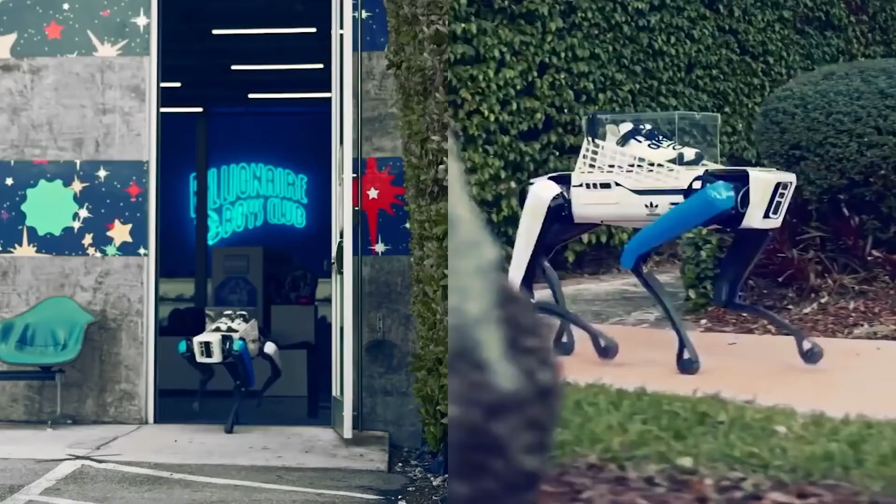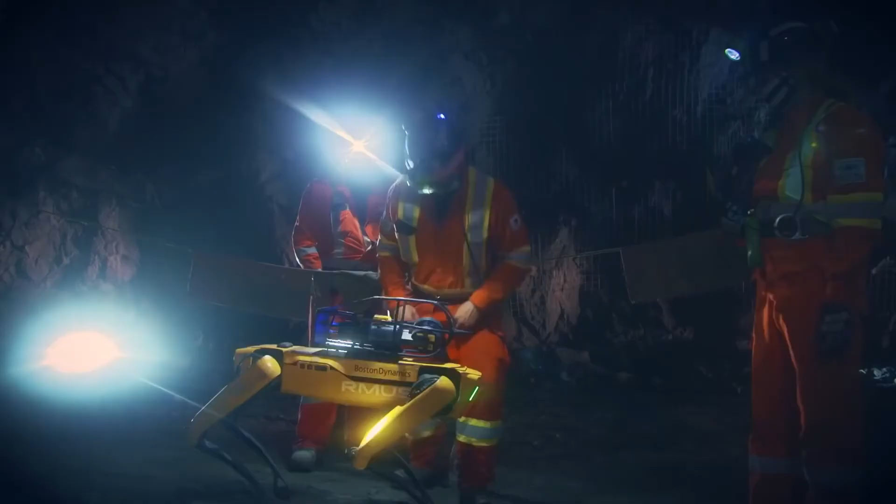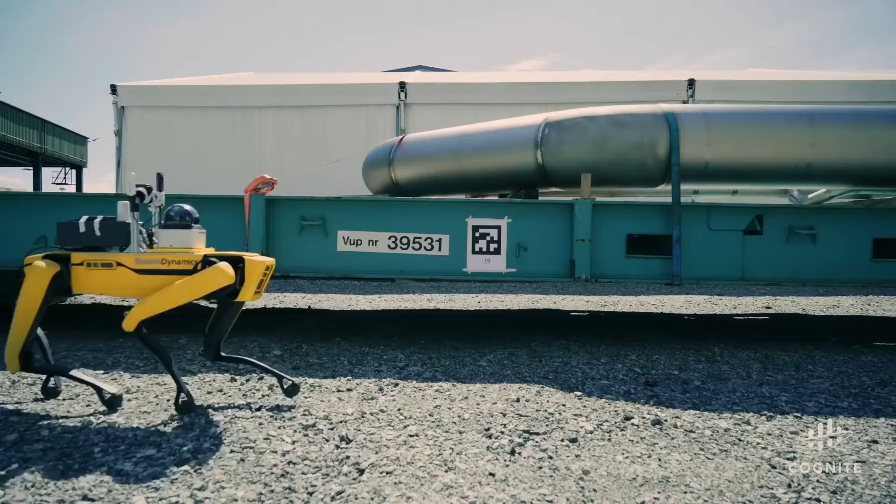Real live robot dogs! One priority is keeping employees safe. There's nothing that compares to the way that Spot steps or moves around objects. Traditional robots, it's impossible for them to get where we need them to go.

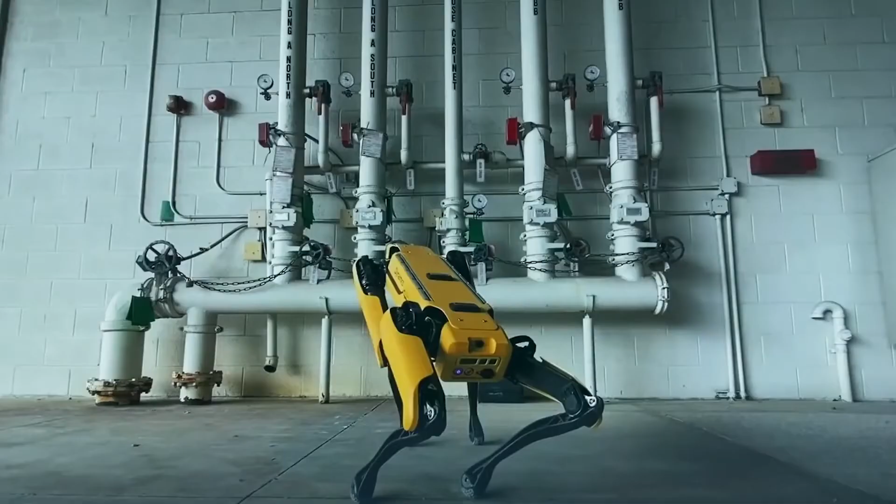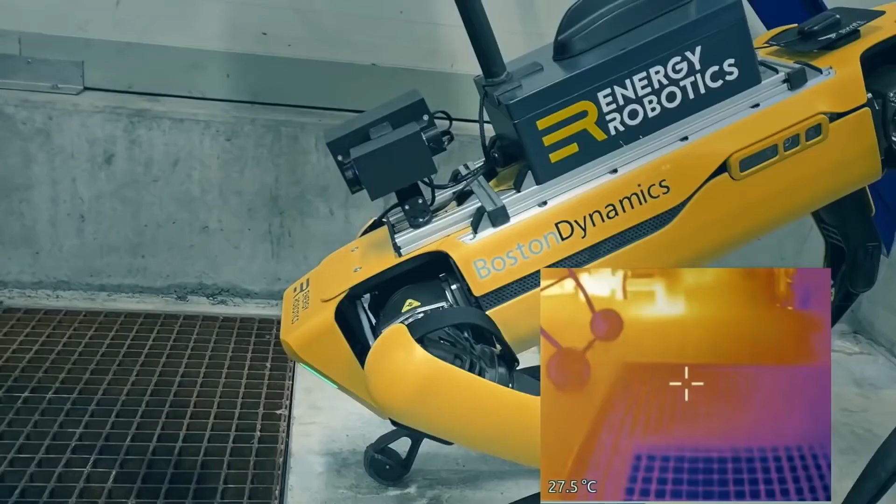Spot allows us to conduct our asset inspection tasks very repeatably and regularly. It's going to increase productivity, while also keeping our employees out of harm's way.

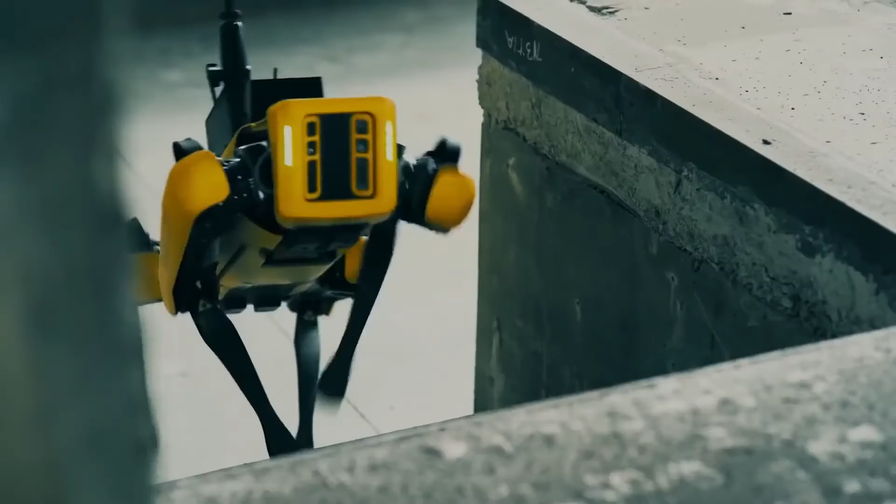I believe that the opportunities and the possibilities are literally endless.

So hopefully you enjoyed that presentation. That video just gives you a flavor for what we're going to talk about today. If you look at Boston Dynamics, we're really an engineering company making sophisticated technology and then identifying use cases for how we can adapt this technology.

But if you look at the company, we really visualize the marketplace and the world to come. The vision of all the founders of Boston Dynamics and the engineers is really to talk about remarkably capable robots in a common world environment. And we're seeing that today, not only with robots within the industrial world, but autonomously driving cars and vacuum cleaners and things like that.

As we project out into the future, we're going to see more and more robots doing common day activities for us, to make humanity a little better and our workplace a little better. At Boston Dynamics, our goal is to lead that effort in terms of creating highly advanced mobility and dexterity type of robots. Robots that can maneuver around difficult terrain and then provide intelligence to capture data for us. That's the real goal at Boston Dynamics.

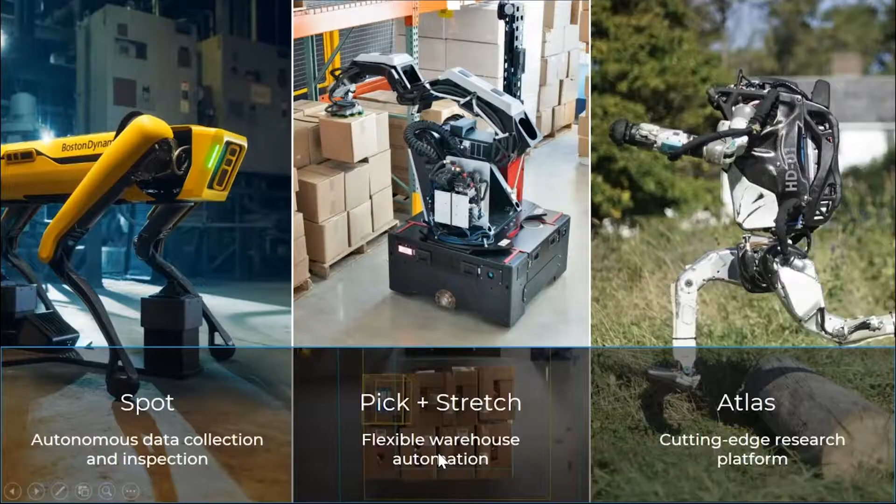Now, I'm going to start on the right-hand side with our robot called Atlas. And these are the robots you probably have seen on YouTube. They do very cool things. They can dance, and they can jump around, and they can do backflips and things like that. However, the Atlas platform is really a research and development platform for our engineers. It is the area where we test out new technologies, new actuators, new hydraulics, new electronics, new software to see what will work on a robotic individual.

So this is not a commercial element. It is our research platform for developing new technologies.

In the middle is our latest commercial offering. It's called Stretch. And as you can see, Stretch is for warehouse automation. Think in terms of picking up boxes and putting boxes on a pallet or taking them off a pallet, or loading a truck or loading onto conveyor belts, things like that. Stretch was just introduced to the marketplace in 2021. It is already adopted by a number of early adopters who are putting it through its tests right now in very large organizations, as you can imagine. And it will start becoming very commercially viable in 2022.

And then on the left-hand side is our Spot robot, the autonomous data collection and inspection robot that walks on four legs and goes just about anywhere. And I'm going to spend the rest of this presentation talking about Spot.

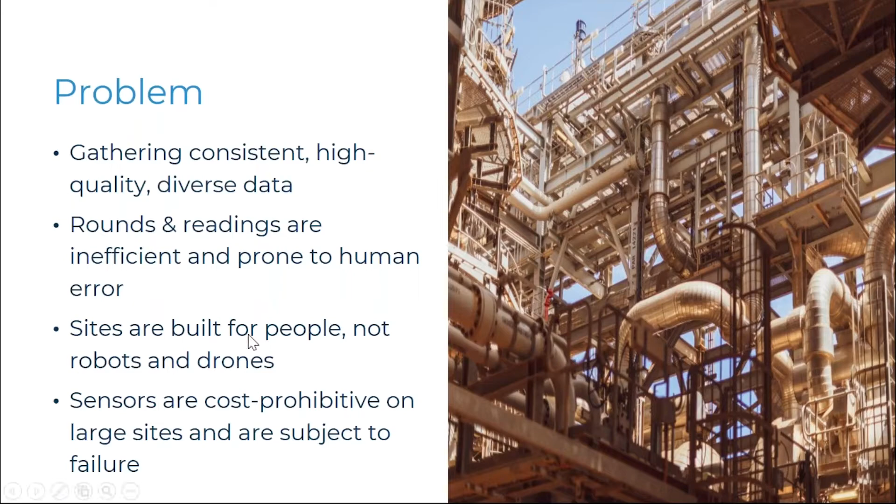So with that, let me introduce Spot. I'm going to introduce Spot in terms of 3 key ROIs that I want to talk about. You can look at this in terms of many iterations, but I'm going to trust these 3 ROIs and talk about them, give you a couple of use cases.

So without further ado, again, Spot was just launched in 2019. So a little over a year ago, frankly about 18 months ago, it was first introduced to the marketplace. And most of that time, we were in a global pandemic. However, given those circumstances, we still ended up working with customers, employing over 400 robots, and we're actually moving close to 500 robots in the next quarter that customers are using today on site on a global basis. So within an 18-month period, nearly 500 robots in the marketplace.

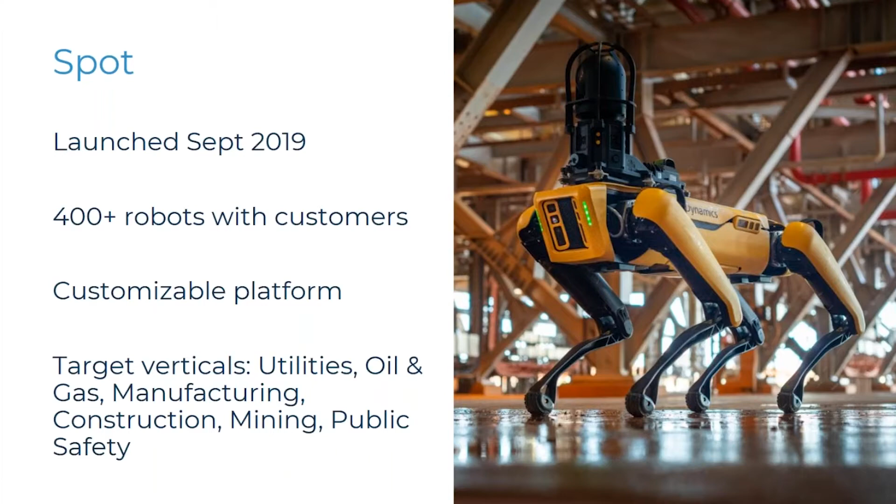One of the reasons for that is the robot, and I'll refer to it as the athleticism of the robot, the ability to walk around very cool places. But the other part of this is the customized platform that sits on top of the robot that allows you to interact with the robot. So as we go around, we talk to the robot, customize the platform, and that's what's going to drive Spot.

So let me talk a little bit more about this and those 3 different ROIs. The first one is safety. That's a real no-brainer here. Can I send a robot into an area that wouldn't be safe to send a human into? We can all think of thousands of different areas for that, whether it's chemicals, explosive information going on, radioactive information, electrified information. It might be a mine, it might be a power plant. Lots of areas where I may want to send a robot in instead of a human to do that data collection. If I can do that successfully, the ROI for safety is off the charts. I'm not even going to put a number on that.

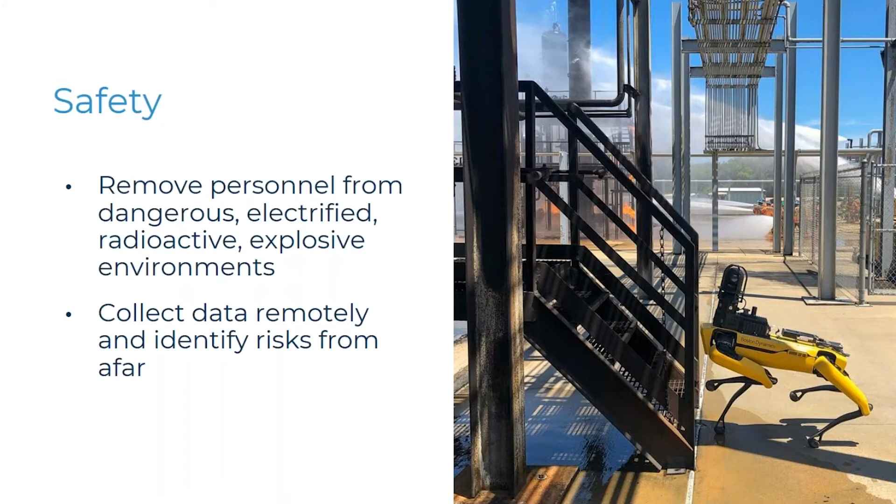Let me give you an example of that we're doing today with National Grid. So we're working with National Grid at their Sandy Point facility up here in the Boston area where I am, and they have a large high voltage power transmission facility that they're running operations out there. When this plant is operating, it is plain out not safe for humans to be walking around in there taking data capture.

However, what they do need to do on a very regular basis is a thermal analysis of key connectors throughout the plant. So as you can see here, Spot Robot has a thermal IR camera built on top of it with some computation in the background. It walks around the plant, the facility, and starts capturing data on these bushings, asking: are we running hot? Are we running cold? Is one hotter than the other? That analysis is then fed back to the humans for further analysis.

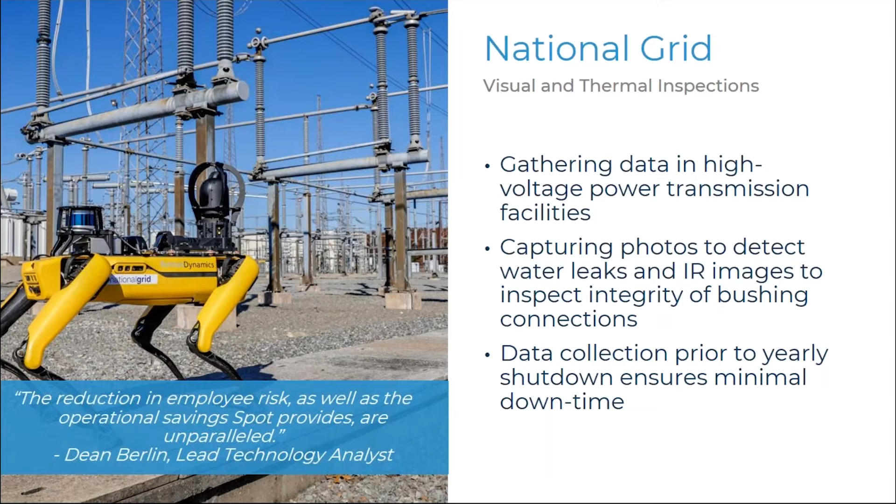And then we can dump the information and say, hey, we need to create a work request, whether that's into a Maximo system or an SAP system or whatever your back-end enterprise asset management system might be. So that example alone, National Grid is now actually looking to expand this to their New York facility, and we're going to continue to move on from there.

The next key ROI is efficiency. So think in terms of driving efficiency. Can we be more efficient in terms of reducing time between inspections? Can I create an inspection route that goes on a regular basis, maybe daily, maybe weekly, that captures information and drives efficiency? Because now I don't have to hire subcontractors, or more importantly, take my own high value labor and have them do this. They can then be the ones reading the data and doing the critical decision making. So efficiency is a huge ROI with this.

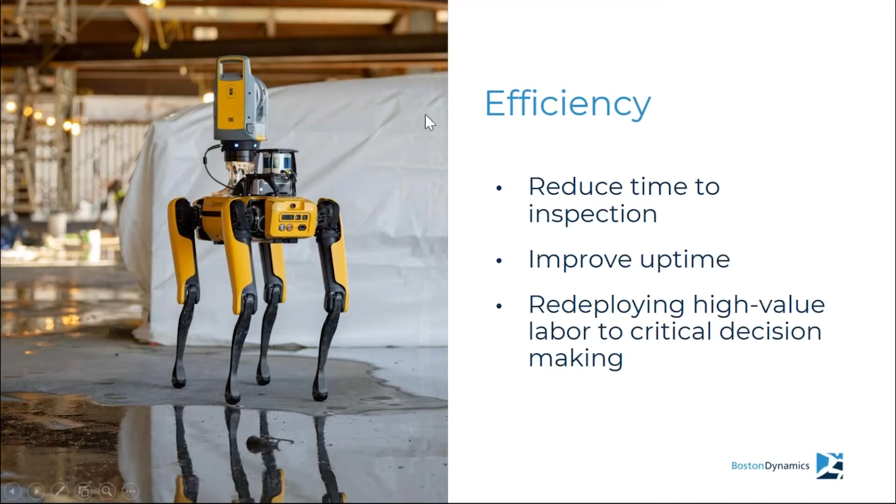An example there is with Woodside. Woodside is one of the larger global natural gas providers, based in Australia. They use a number of Spot robots capturing a number of different types of data points. We talked about diverse data—they're doing gauge reading, leak detection, noise anomaly detection, thermal inspections, and gas detection. They're using multiple Spot robots with different sensing devices to capture this data, and not only are they reducing the risk, but now they can do this inspection every 12 hours without any human intervention, feeding this information into their back-end systems for further analysis. So that's driving efficiency—limiting the time between inspection, limiting the time between detection.

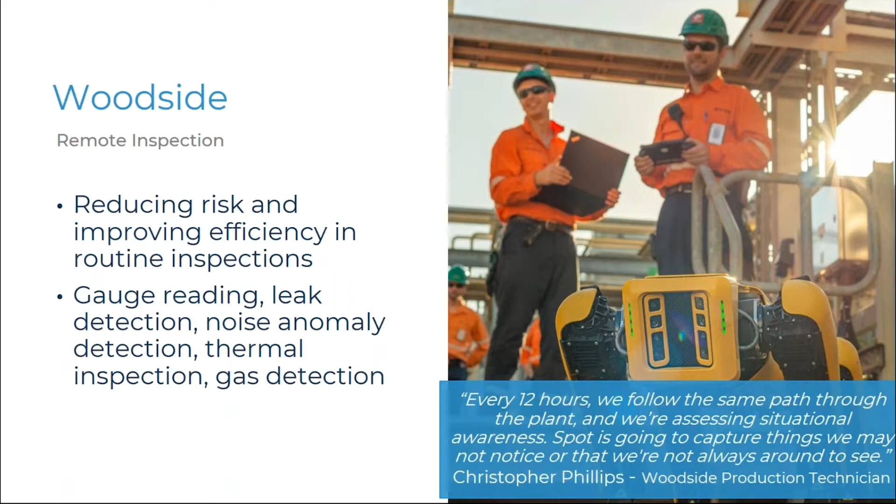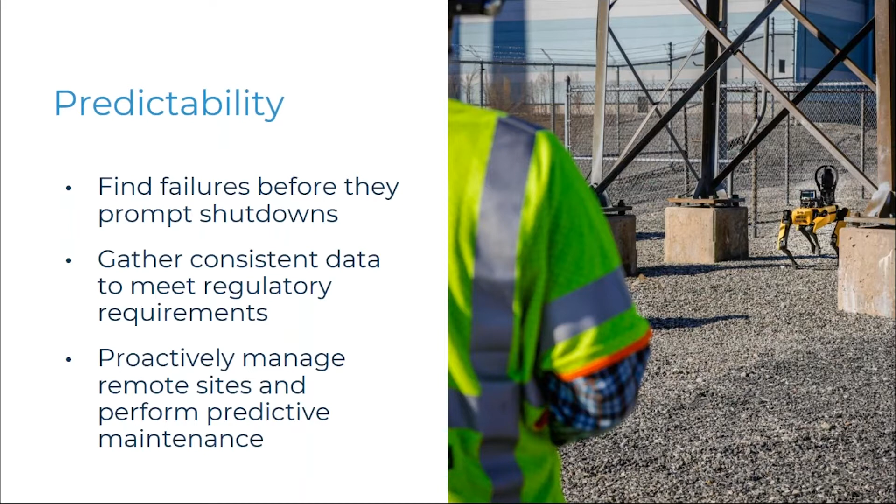The third one is predictability. And again, the ROI around predictability is: can I identify a problem before it causes a bigger problem? This is what we're all trying to do in the maintenance world. We're trying to determine, is something likely to fail? Are we headed for a disaster here? Can we avoid an unscheduled shutdown? So predictability and data gathering—we're going to gather information, but it's not just about information, it's about what you do with it. How do you analyze the information, then take action?

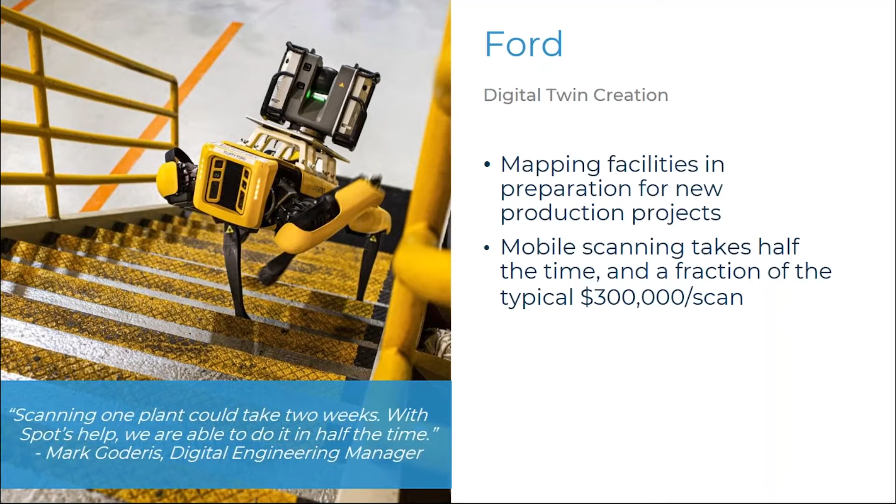Now, in order to do that type of scanning using a 3D scanner, typically Ford would have to hire and subcontract a crew, and the crew would walk around with a tripod and cameras, placing the camera down, taking the 3D scan, doing the imaging, capturing it, picking up, and moving to the next station. Ford estimated it cost about $300,000 per scan. So given that astronomical cost, Ford is not going to be doing that too often. But with Spot doing this, you can do it much more frequently, so you can detect problems or pay your subcontractors more effectively by determining where you are in the build process.

Many other use cases that I'm going to talk about, and I'll just keep touching on each one of these—but again, you can go to bostondynamics.com for much more. Use cases in construction, oil and gas, utilities, public safety, in terms of search and rescue operations, mining, manufacturing, healthcare—all of these types of use cases are in operation today.

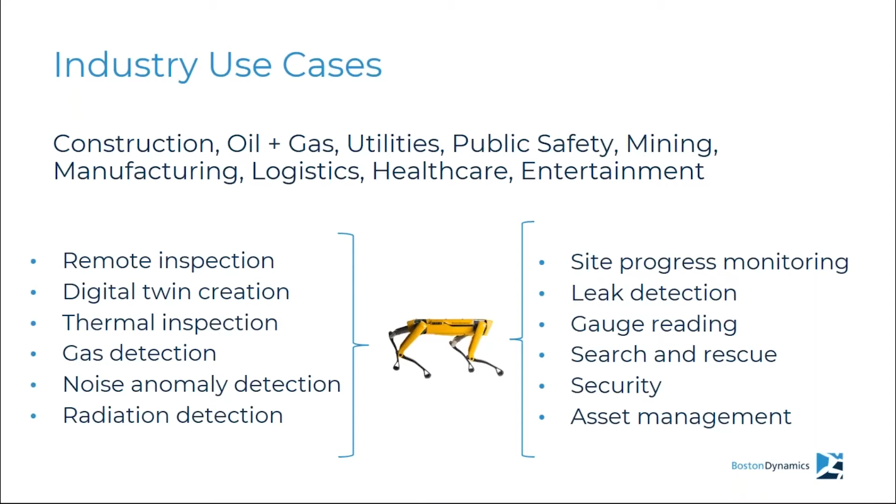What I want to do now is talk a little bit about Spot and what makes it special. I'm going to show a couple videos and we'll talk through this a little bit.

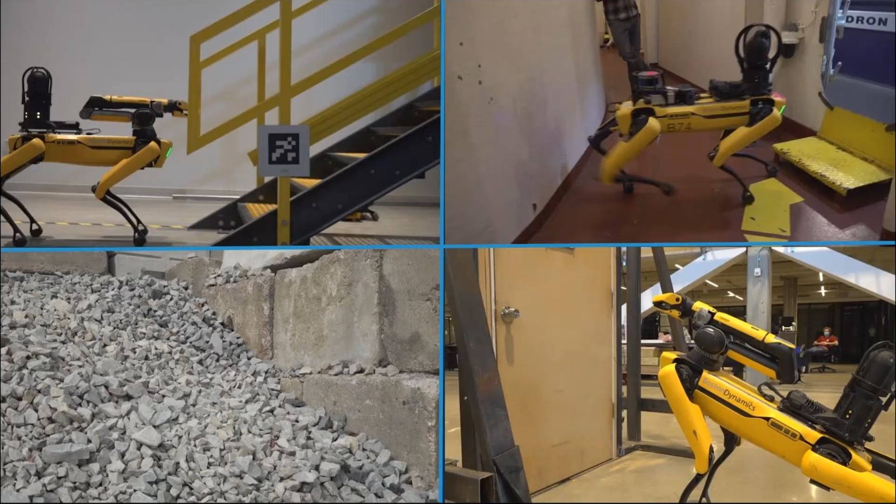On the screen right now, you see 4 different videos, and I'm going to walk through each one of these. Really what this is all about is to show you the robot's athleticism, its ability to walk around and get into places that you don't think about robots getting into, so that they can get to a place to collect the data.

In the upper left-hand corner is the first one. I'm going to show you some simple examples of Spot walking up and down stairs that are simulated into like a plant where you have open grated stairs. As you can see here, the robot's actually manipulating and walking up and down stairs. Now, the key to this is there's no human controlling this. You point the robot to the stairs, it knows how to walk up and down stairs. As it comes back down the stairs, it can go up frontwards or backwards down the stairs, determining which is the better option.

That's one example. In the lower left-hand corner, I'm going to take that to the next level. So the stairs are nice, but they don't move, right? So the balancing factor is not that important. But now in the lower left-hand corner, you'll see Spot going up a much more difficult terrain. These are loose rocks on a very steep incline, and you'll see as the rocks give way, the robot automatically rebalances itself. So think in terms of your site out there and manipulating Spot around these difficult sites.

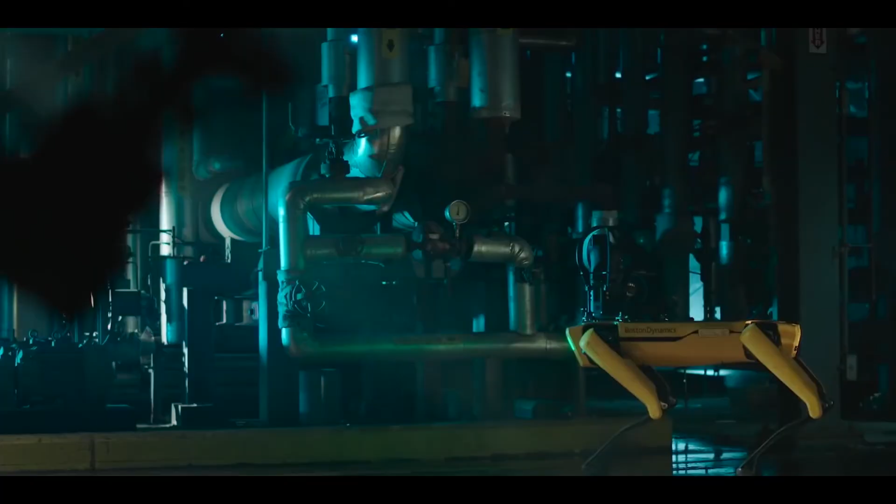Hey, Jack, it's here. Okay. Hold it. Yeah. Stand. Look at that. So, yeah. I'm gonna zoom in and take information, so see that? Yeah. And then it'll just get sent directly to you.

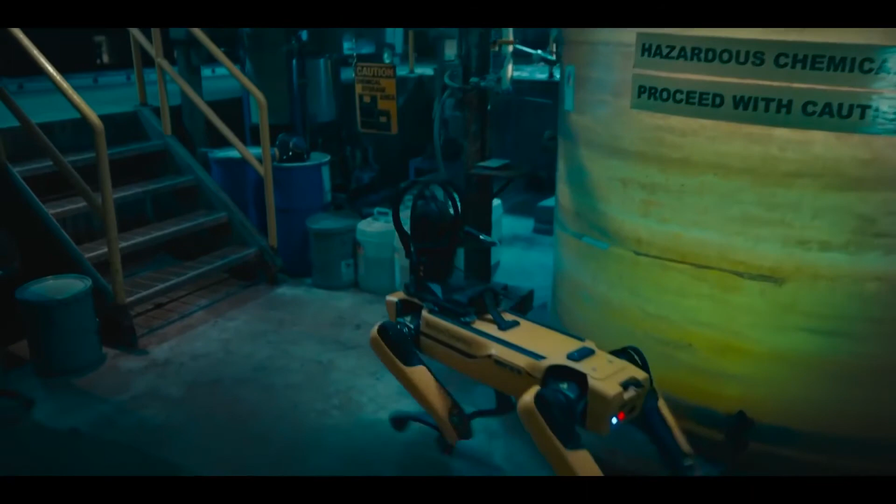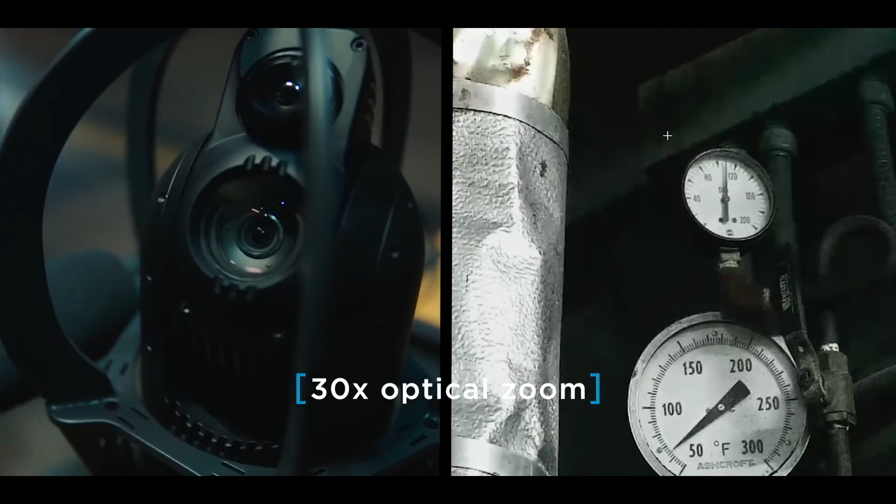You cannot see the video more? No, maybe you can, but we can't. Oh, okay. I'm sorry. Let me try again. I'm sorry, Maura, I'm able to see the video. Thank you very much. Keep going, Paul. Oh, okay.

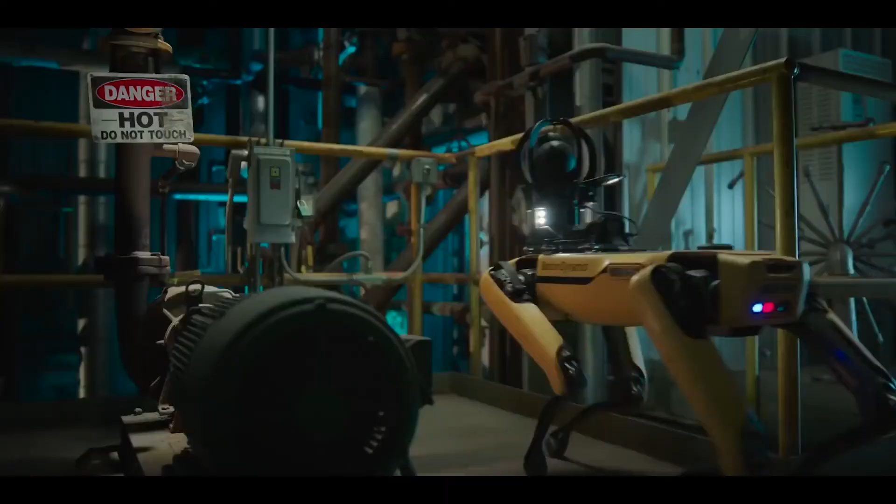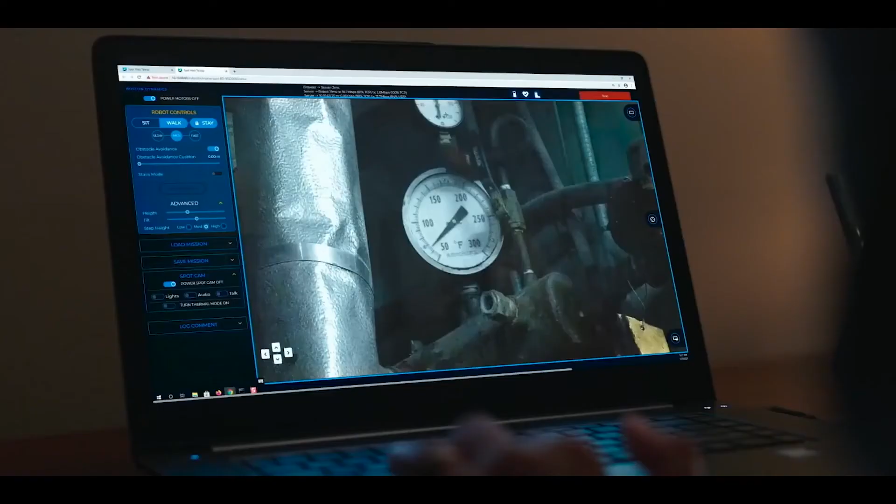Boiler 3 is a little hot. Hello? I'm on my way down there right now. No, just hold on. I'm looking at the gauge right now, and everything looks fine. Okay. Good night. Hey.

So hopefully you saw that. I know Terrence mentioned he could see it. Hopefully the others could see it. If you could not, send me an email and I'll show it where you can see that.

The last part of what I want to talk about now is another example of how we are delivering solutions to our customer base. And in this case, this will be a good introduction to Joe Birdie when he comes on. We're actually working with a partner, IBM, in a very strategic way, where we're working with not only their product group within enterprise asset management and their AI technology, but also their services organization to deliver very customized solutions with the robot, and can talk a little bit about that.

But when we first started with IBM, they came to us and they really saw the opportunity here to leverage Spot to bring not just inspections, but really transformative solutions to the industry. So when we talk about inspections, that's just the tip of the iceberg. So we're really going to start working with IBM, and we're going to be launching and bringing to market a number of different things. And if you can go to MaximoWorld this year, you'll see lots of that at MaximoWorld.

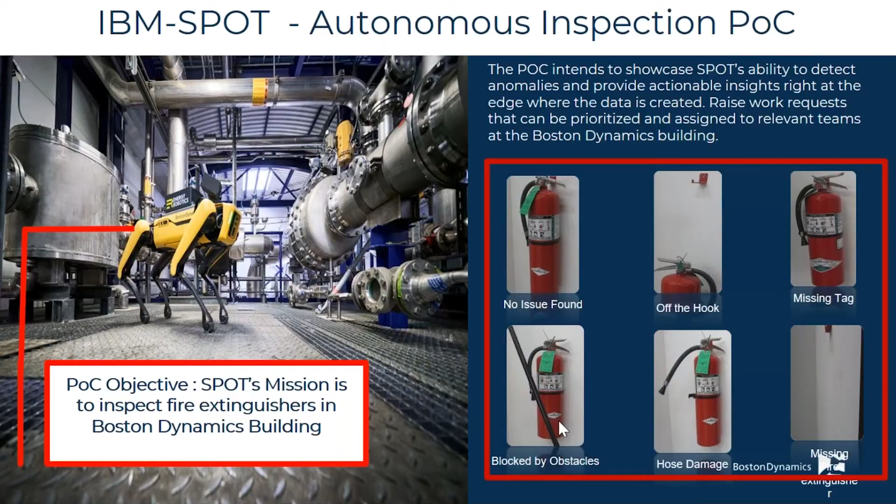So once we've done that, the next thing was, okay, can we train Spot, the robot, and the payload equipment to run these autonomous inspections, take a look at a particular asset, and determine what should be done? What you'll see in this example, the action at the end of this, if an action is needed, is we create a request and dump that request into Maximo on the back end.

So let me run this video a little bit. And you see Spot here, and basically the mission gets kicked off actually in Maximo. So someone will go in Maximo and say, hey, run inspection route number XYZ. And this will send a signal to Spot that says, get up and get going.

So once that's done, Spot will then start its remote mission. Again, there is no human guiding this at this point. The upper left-hand corner is an inset showing you kind of the Spot view, if you will. So this is what Spot's visualizing.

And I'm going to stop it right there because during the programming of the inspection route, this other robot that happens to be laying on the floor upside down was not there. So as the robot starts going down its pre-recorded path, it has onboard obstacle avoidance. And it knows, hey, this wasn't here before, what do I do? And it knows how to step over it automatically. You don't have to train it.

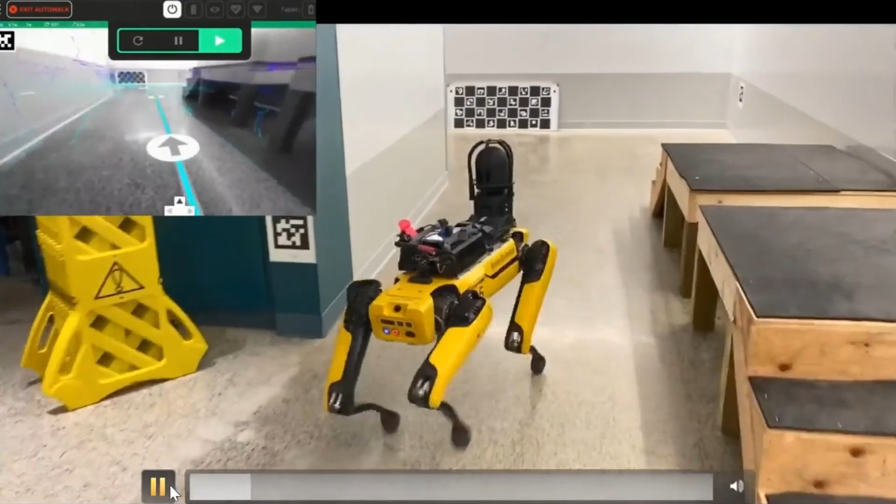So it's taking a picture of the first asset. No issues found, does the comparison with its onboard computer, and moves on to the next asset. I'll just show you a couple of assets. It goes on for quite a while here. But as it starts tracking, it's going to track to the next area.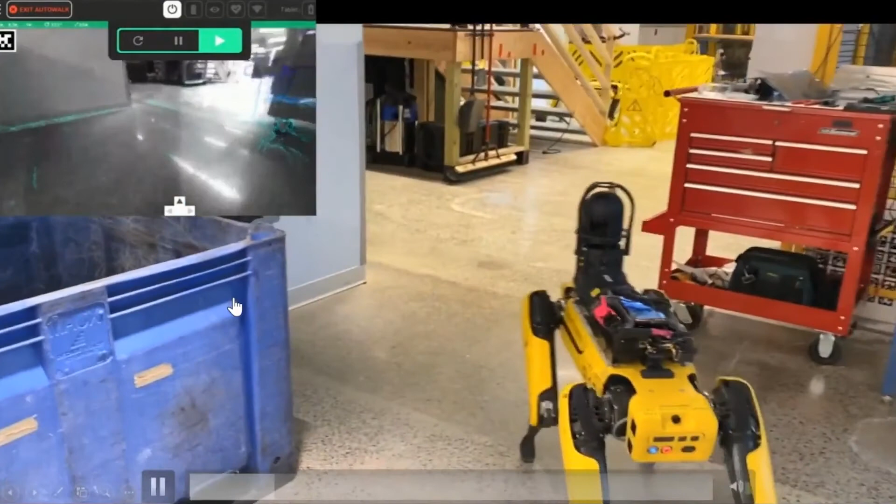And I want to show you another place where it runs into a kind of an issue. So here it's saying, I'm missing the fire extinguisher altogether. And I'll stop it there.

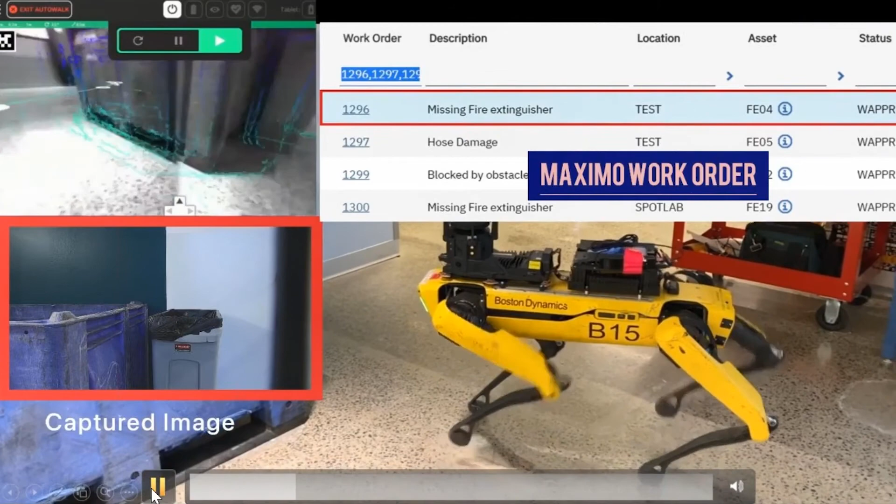So what has happened is the analysis was taking place here on the edge computer. It determined there was a problem. It said, for this particular asset, 1300, generate a work order in Maximo. After it's done doing that, it continues on its path.

And I'll show you one last one where we actually put in an obstacle and watch Spot kind of traverse over that again.

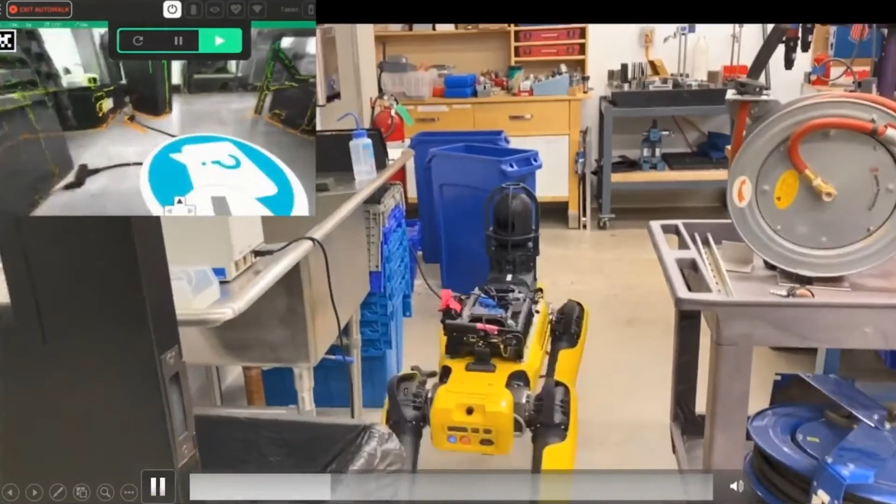So, very tight spot. You'll see a cable on the floor there, and you'll see some barrels in front. It's going to determine these barrels are too close, so it's blocked by obstacles, and it will create a work order.

And now it's going to figure its way out of that area and then continue on its way. So I'm going to stop it there, and actually I'll back it up just a tad.

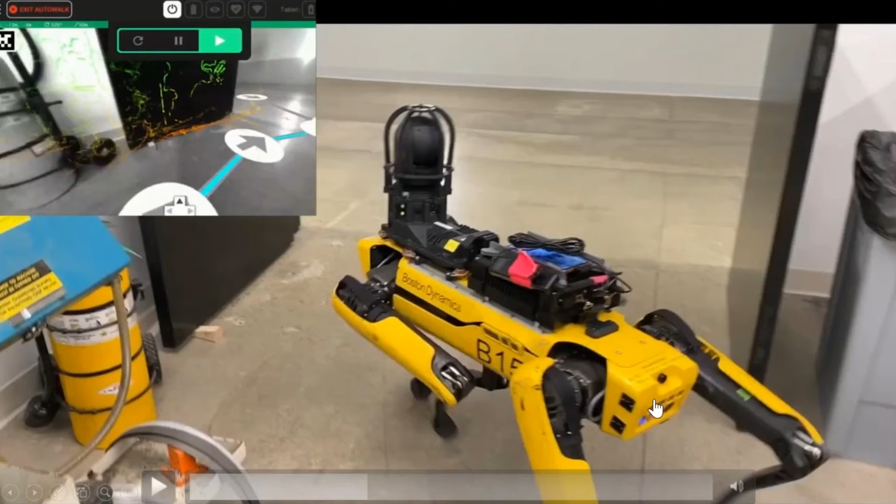So let me point out a couple things on top of Spot. Here's the robot. On the front here are two different things. One is a 360-degree camera that does exactly what that mentions - it looks around 360 degrees to determine what's around it, looking at things and capturing data as it goes, so we don't have to move the robot every time.

And then on top is a more sophisticated camera that allows you to pan, tilt, and zoom up to 30x optical directly on particular things you want to take a picture of. This will also rotate around 360 degrees. And on top of that camera is an IR camera capturing thermal images. I'm not going to show you the thermal images in this example, but that's also what it's capturing. So that's all on the front end here.

The back end is what we call our edge computer. It's basically technology communicating with Spot saying, now that you've captured it, what's the analysis and what to do about it - which is send it up to Maximo in this example.

So with that, let me summarize what we've seen today. Hopefully we'll have time for questions, and if not, I'm happy to answer them. But basically, let me just summarize this up.

First and foremost, we provide transformative mobility - terrain agnostic, remote access, consistency. The Spot robot will do this over and over again, and we can train it to walk over very difficult terrain. It's applicable to multiple industries out there, not just manufacturing, not just plants. It can be done outside, it's done in mines, it's done in public safety environments doing surveillance - many industry solutions.

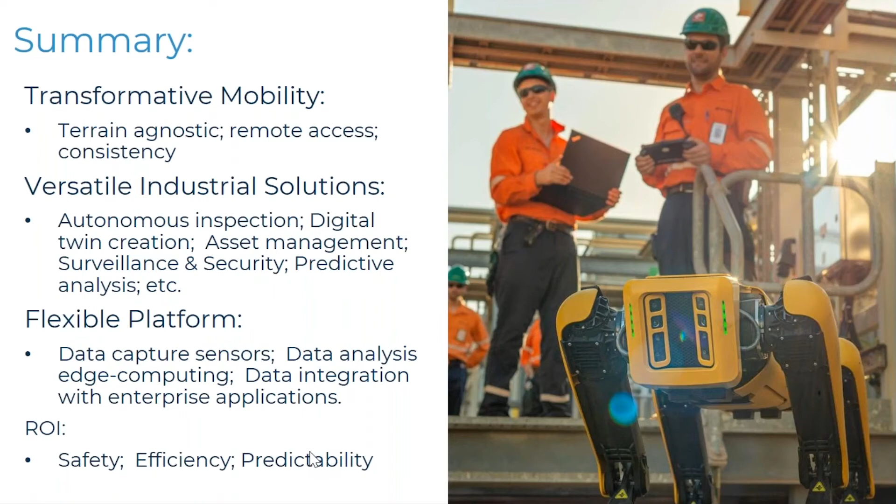So, terrific. Back to you, Terrence.

Terrific, Paul. Wow, wow, and wow. So Spot is a quantum leap. Spot is transformational. MaximoWorld is going to be transformational. This is just one of the quantum leap technologies happening. While the pandemic has been going on, some developers have been very busy in the background, and they're making extraordinary progress. So Spot is certainly one of them.

And now offer AI and unlimited flexible elastic cloud. So there's all kinds of options. There's all kinds of other innovations at MaximoWorld too.

So even if you're not a Maximo user, you might want to consider jumping down because there's going to be a ton of innovation. If you are anywhere near either considering Maximo or using Maximo, there's absolutely no reason not to be at this conference because there's a ton of innovation like that.

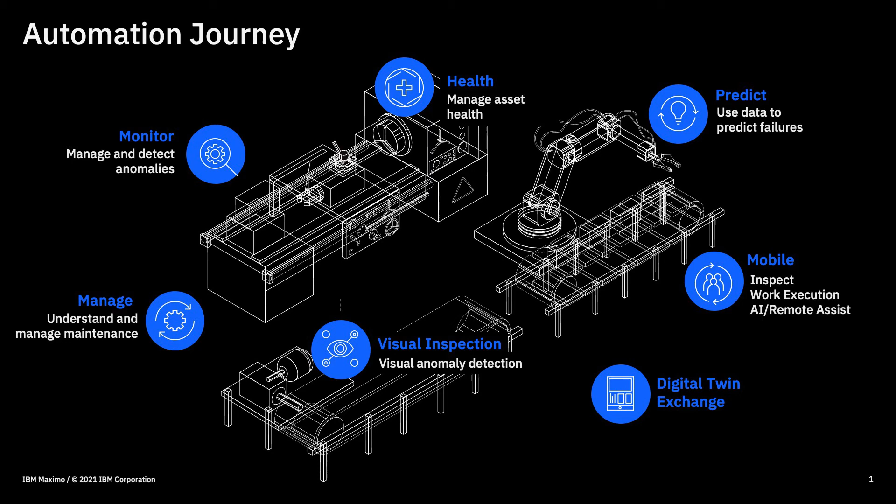So pretty excited about that and the growth in that particular area as well.

One of the first questions I got with robots is, as a technician, am I going to get replaced by a robot? The answer is definitely no. First, those robots need to be maintained, so there's a maintenance cycle on the robot that needs to occur. Second, there's a lot of maintenance that never gets done, and that's the dirty little secret nobody wants to talk about: there's more maintenance work to do than there are people to get it done. So I'd see something like Spot doing routine inspections, something not very exciting for a technician, while the technician focuses on higher value-added work like upgrading equipment, modernizing equipment, and doing critical repairs.

So if there's an outage, technicians focus on that versus just walking from room to room looking at fire extinguishers. Doing routine maintenance through robots, and higher value-added work through technicians. The other thing is scaling technicians, especially your best ones, across many sites. Imagine one technician monitoring equipment across 10, 50, even hundreds of sites through remote monitoring. Especially with COVID, where social distancing became the norm, the ability to do remote monitoring has accelerated. Consider this year as the year for remote monitoring, and people really understanding the need to scale condition-based monitoring across many sites, leveraging your best technicians to remotely diagnose what's going on with equipment. So definitely interesting innovations in that area as the demand for going digital has become more important.

Each year, the IBM Maximo community gathers at MaximoWorld to share innovation, technology, best practices, data management and governance, and most of all, a culture of reliability and asset management through effective use of Maximo. Maintenance is much more than managing work orders these days, and competitive companies are expanding both the breadth and depth of how they generate value from assets. Top quartile performers realize that reliability, asset management, safety, and sustainability should all be aligned. In order to do that, you need technology at the center that allows people to add data, to add their observations, to make better decisions for achieving your organization's objectives through your technology investment. If you feel like there may be opportunities to increase the return on investment that you have in IBM Maximo, MaximoWorld is definitely the community that's for you.